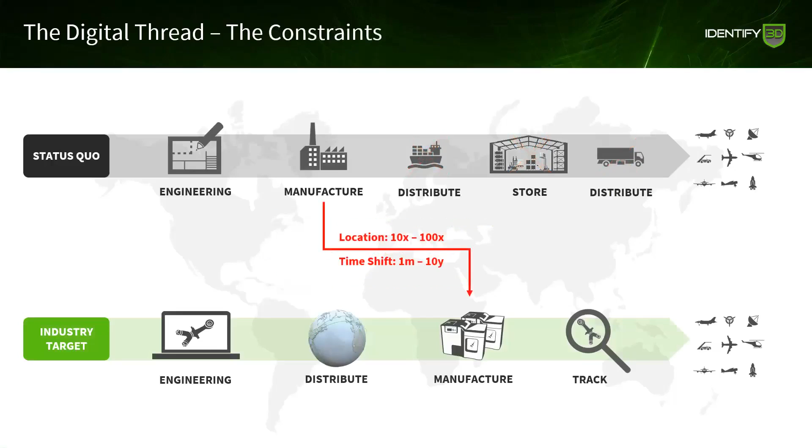Once we talk about the path of data between the engineering company that owns the data and the manufacturing—whether it's the internal manufacturer within a large organization or a supplier—we come with a lot of challenges. Challenges related to who has access to the data, and what can be done with the data.

If someone gets hold of this manufacturing data, they can maybe produce more parts than are supposed to be sold. There might be problems with how the parts are made and therefore their physical properties, and then there are problems of liability when it comes to the owner of the data or the owner of the part being put in the marketplace.

Or for instance, problems related to the data running in a CNC machine. What happens if an operator makes changes to speed it up because it's Friday evening and he wants to go home—what happens to that part or to that machine, even if you want to protect that asset? What we understand here is really guaranteeing the integrity of the whole of the data as it's generated, as it moves through the supply chain, as it is consumed by a machine.

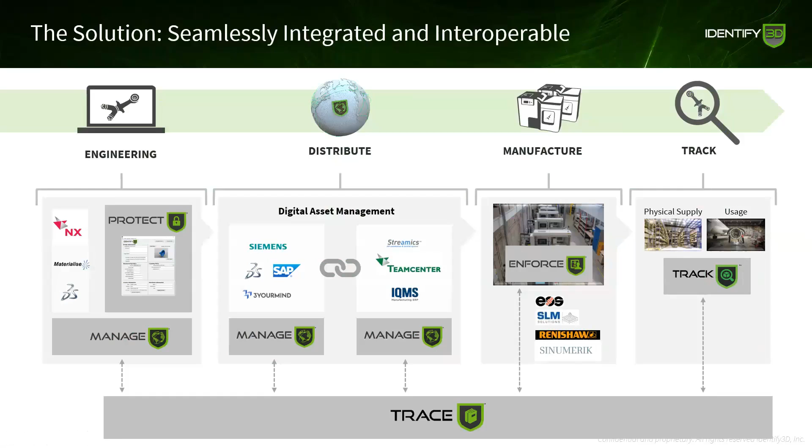So this is the high level of what we are doing. How we do it in the details is the subject of the next presentation from my colleague Daniel, which is going to show you a live demo.

One thing I want to highlight: what you're going to see now is an NX to Sinumerik demo. This is easier for us to show because we are embedded in Siemens NX. But as I mentioned, our Protect element can also run standalone if you use, for instance, SolidWorks or other software—we're trying to be integrated as much as possible with all those softwares, but it also works as a standalone.

So Chris, you there? Yeah, absolutely. Perfect, Fabrizio, that was great. So Daniel, I'm just going to give you your privileges now, we're going to make you presenter. I think everybody here is anxious to start seeing this stuff in action, but that was a great high-level presentation. Thank you, Fabrizio. Thank you.

All right, Daniel, it looks like we got your screen, let's see if we hear you. Yep, I'm here. Okay, perfect. Thanks, Chris, Fabrizio. Like Fabrizio said, I'll walk you through a full end-to-end demo here, starting within Siemens NX and ending at a Sinumerik control. So I'll go ahead and get started here.

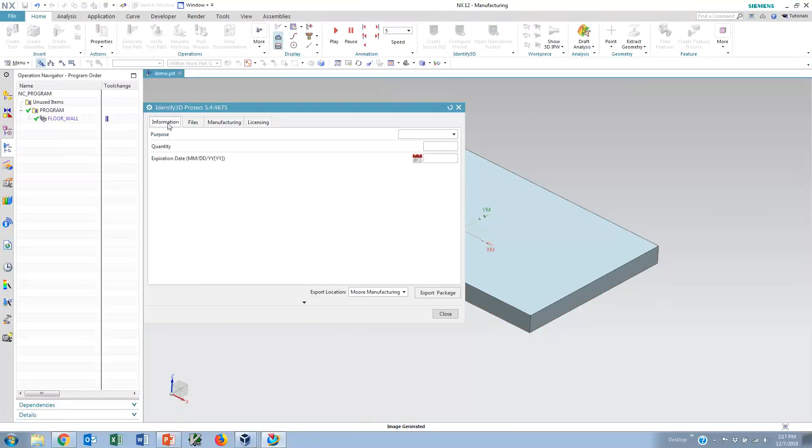You can see I have a very complicated part here that I want to manufacture. Within NX, we have our Protect application up here on the toolbar. We actually have a couple of different types of integrations in NX: one is a plugin with the same look and feel as other applications within NX, same format. We also have the ability to launch our standalone Protect application, and that's what I'll do for the demo. So I'll go ahead and launch Protect.

When Protect comes up, since we have this integration within NX, we're able to pull out information of the part and automatically load it within Protect. All right, so here's Protect.

So basically in Protect, you can see these tabs here. We go through a workflow to set up our digital container, or what we call a DSI, which is short for digital supply item. So the first tab here is defining the information on this part.

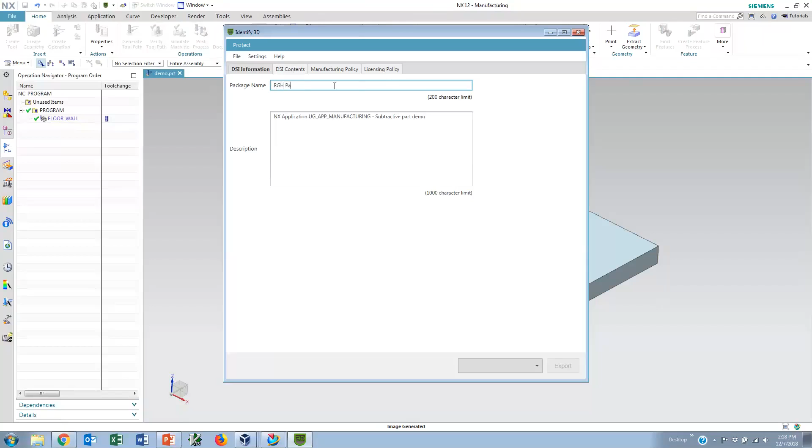I'll give it a package name, just give it something unique. And then I can give it a description if I want, so: part to be manufactured. This will follow this part throughout its digital life as we go down the supply chain.

Now I can define what goes into this digital container. This digital container contains two different sections. The first section is a private section - this is data that you want to protect, data you want to control who has access to. In this case, we were able to pull in the PRT file, the NX part file, as well as the G code that had been generated.

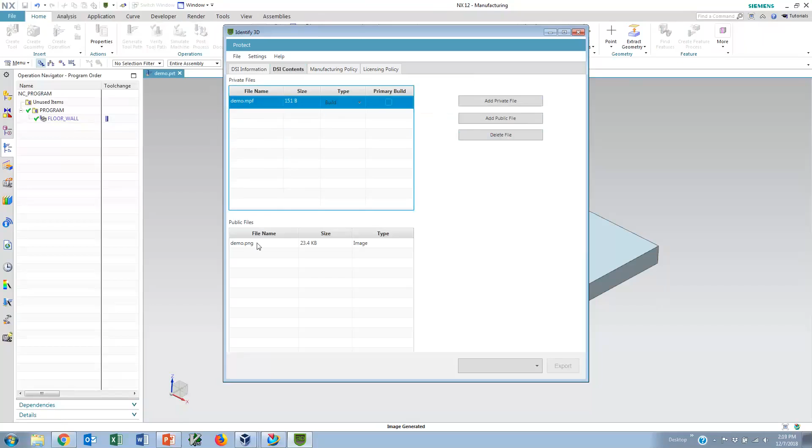For this demo, I'm only concerned about the G code, so I'm going to remove the part file and send the G code downstream. The second section of this container is public information - this is information that you don't care if anybody has access to throughout the supply chain. This could be ordering instructions, and in this case it's just a simple picture of the part that's being manufactured. So now I've defined what's going into my container.

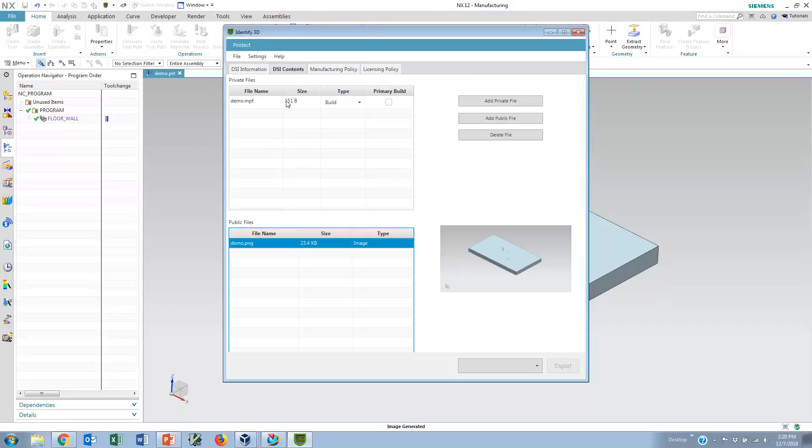Now I need to define the business rules and how this part will be made. In the manufacturing policy, I can select the type of machine that I want to manufacture this part on. So I'll select the device - I have set up a Siemens, just a generic Siemens Sinumerik control for an 840D.

Now I can define the business policy, a license policy. The purpose - this is a production level part. I can define the expiration date, so I don't want this part to be made past the end of January. And I can also define how many of these parts I will allow someone to make - in this case, I'm going to allow this part to be made 20 times.

I can also add a serial number to each of those parts if I would like, and I'm going to assign a pattern to those serial numbers. And then I also can assign a breakage - breakage is basically how we handle bad builds. So if something goes wrong during the middle of a build, we have different policies we can put in place on how that's handled. I'll leave that alone for now.

So now I've defined my digital package and my license policy, and I'm ready to generate the license that'll go to Manage, as well as the DSI that'll go to a digital asset storage. I have this manage register called Monarch Manufacturing. I'll click export - it generates the license file. That license file goes up to Manage, and then it'll generate the DSI, which is just an encrypted container.

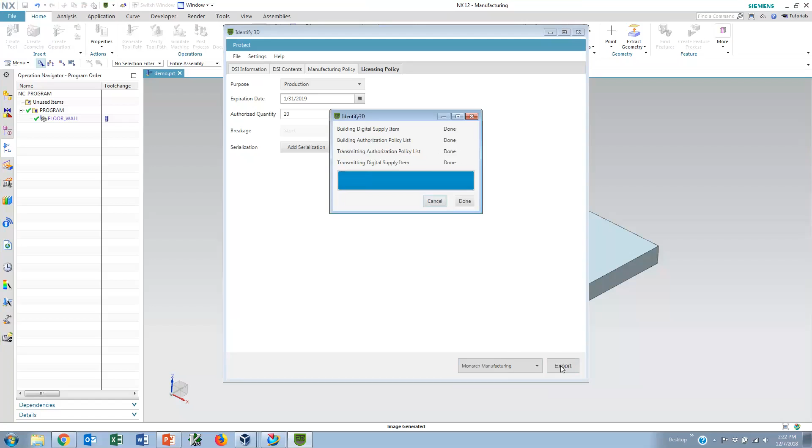However you're getting your technical data package to your manufacturing floor today, it can travel the exact same path. So if you're putting that data back into Teamcenter, or if it's going to a shared network drive, it can follow the same path - we're not changing the user's workflow there. In the demo case, we have a digital asset stored, like a network drive mapped to where that data is going. So now I'm done with Protect, I'll close out that.

And I'll switch over to Manage. In a typical situation, in the engineering and design phase, there will be an engineering Manage running on that site, and then that Manage could then license to a distributor that is running an instance of Manage, and then that distributor licenses to a Manage that's running at a manufacturing facility. For brevity of a demo, we basically go directly from engineering Protect to the manufacturing Manage.

So this is the front end for Manage, so I'll go ahead and log in.

So you can see here that the package we just created has shown up in Manage. There's been no authorizations made on this part yet, and I'm authorized to make 20 of these parts.

So now I'm on the manufacturing floor. I've got a part order in, and I need to deliver these parts to a client. So I'll click Authorize.

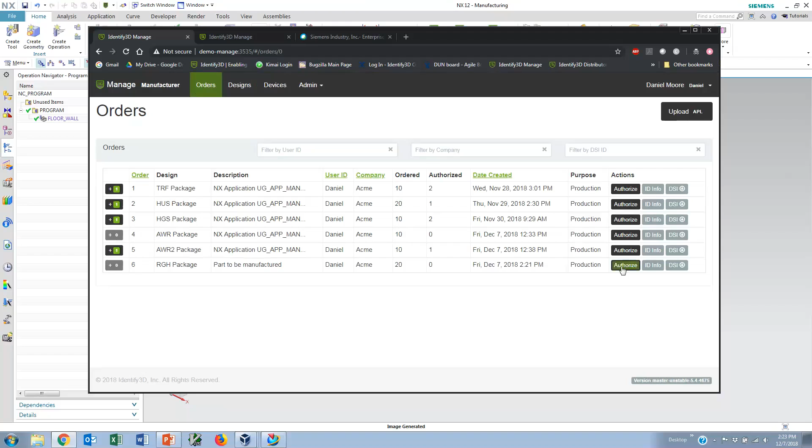Now I can select the specific Sinumerik device or Sinumerik-based machine that I want to manufacture this part on. So if you had 20 machines on your shop floor with Sinumerik 840D controllers, you'd have a list here, and if they were all running, you could select the specific one you want to manufacture it on.

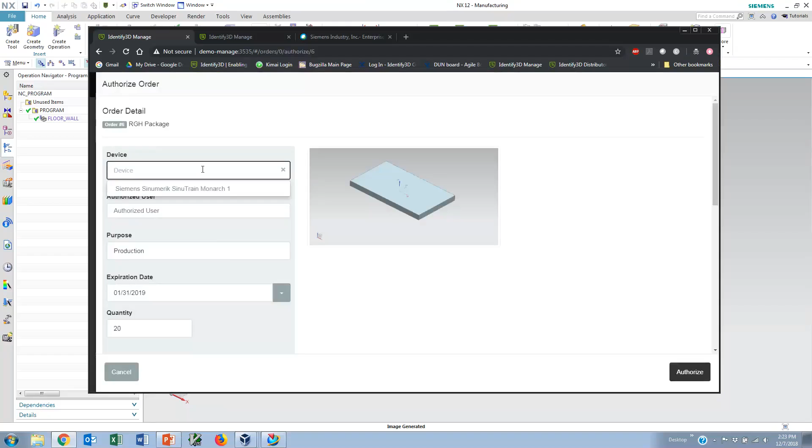In this case, I only have one listed, so I'll select that device.

Here I can also change the expiration date, but notice I cannot set it past the date initially set in Protect. I can only restrict it.

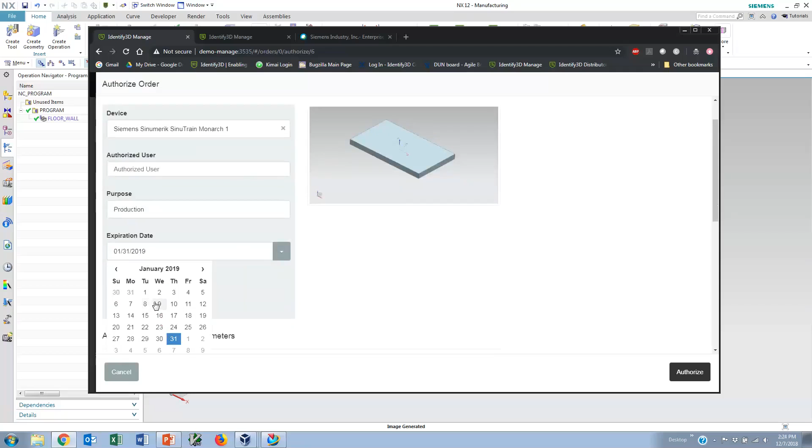Say I need the part 4 weeks before for some finishing work, so I'll go ahead and pull the date in.

I can also change the quantity here, but if I try to increase it—say I want to make 30 and click Authorize—it does a validity check on the license to make sure I haven't violated any of the initial policy set in Protect.

In this case, I tried to make more parts than initially authorized, so I failed the authorized quantity check. So I'm only going to make one part, and I'll change the quantity to 1.

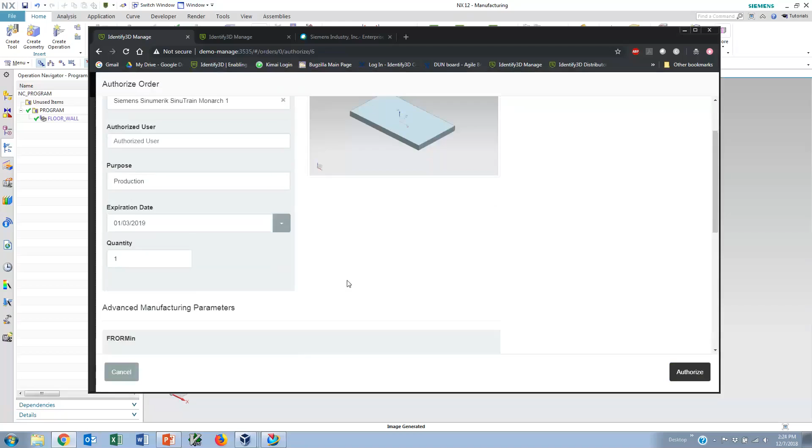Since we're on an 840D controller, I have access to a few build parameters. These build parameters are basically how we're going to allow the operator to run the machine. In this case, we have a simple example: feed rate override.

I'm going to limit the operator to run this part only with a feed rate override range between 80 and 110.

That's set. I also have a policy that this will only run on a 6-axis machine, and my Sinutrain Sinumerik is set up as a 6-axis. So now I'll click Authorize.

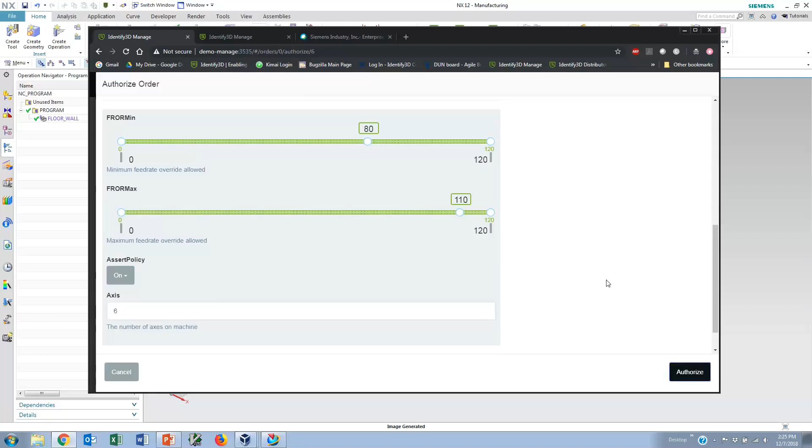It'll do a validity check to make sure I haven't violated any of the initial license policy set in Protect. Once that check is done, I should get green check marks, so the status is good. It generates a sub-license, which is then sent to the controller.

So now I'll switch over to Sinutrain. We actually have an integration of our Enforce software running on the Sinumerik 840D, and this is the Sinutrain, which you're probably very familiar with.

What happens in Enforce is it basically goes off to Manage every so often and asks, do you have a license for me? And as soon as it finds that license, it'll download it.

It'll then go and download the DSI file from a known location, and then create a job on the control. That process usually takes a minute or two, so we'll give it a minute.

There it is. Now we have this new job under the map Identify3D folder, HGS package 5. I'll go ahead and open that real quick to show you the contents.

We actually haven't done anything with the underlying G-code yet. The G-code is still encrypted, but we generate this header file that basically gives you information on the part.

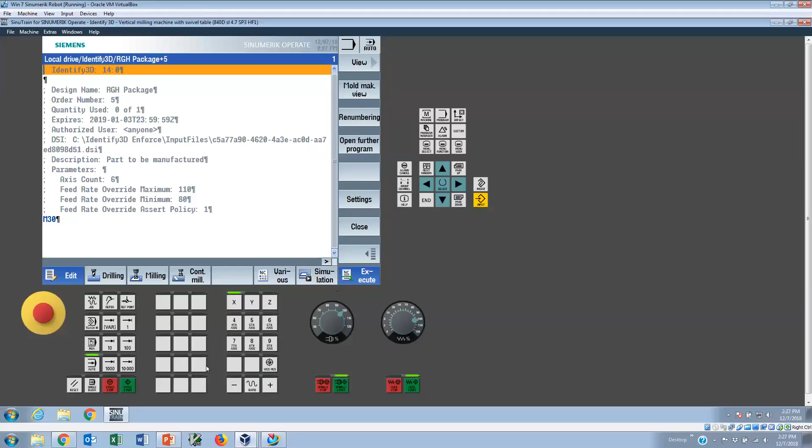Now I'll go ahead and click Execute to load this program. And now the program is loaded.

We still have not decrypted any G-code, but if I slide the feed rate override dial to something below 80, you can see that we post an alarm. The alarm says feed rate override setting too low—the restricted range is 80 to 110.

If I try to run the part program now and hit cycle start, it will prevent me from running the program. Likewise, if I go above 110, the alarm shows again and prevents me from running. So I have to run this program between 80 and 110 for the feed rate override.

As soon as I slide that dial back within the allowable range, the alarm goes away. I can now hit cycle start. It decrypts the program and then allows the program to run.

This part takes quite a bit of time to run, so I'm not going to let it run to completion, just for brevity.

One thing while it's running, if I were to slide the feed rate override out of range, it will actually stop the program and prevent me from restarting until I slide it back into the allowable range. I hit start, and it picks up where it left off and continues to run.

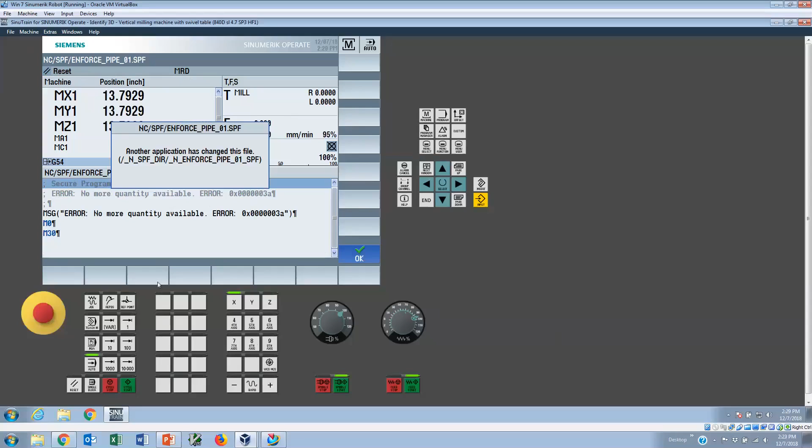So for brevity, I'll hit reset to stop the program. Now, since I've only authorized one part to be manufactured, and I've run that one part, it'll reload, but now I get a different header file that says no more quantity available. So if I try to run this program again, I get an error saying no more quantity available. I'll hit reset to clear everything out. And if I go back into Program Manager now, that particular job that was just created has been removed, so I'm not allowed to run that program again.

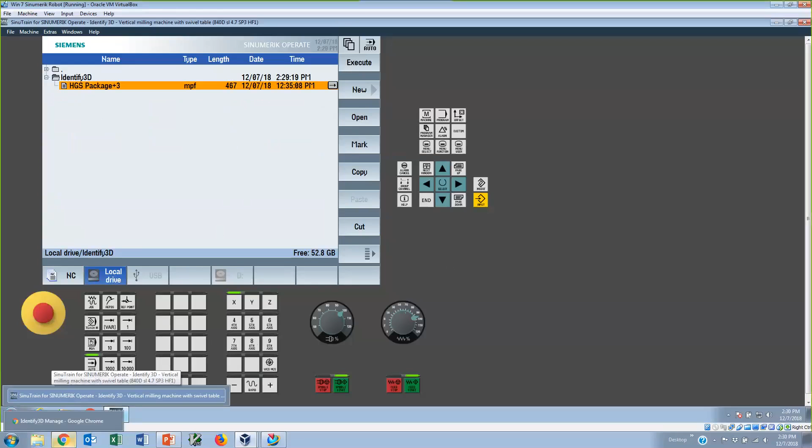So what ties this all together now is trace. We've gone through NX, Protect, Manage, to Sinumerik. So now if I switch over to trace and log in here, I can see a complete history of everything we've just done.

So I'll go ahead and turn this over for any Q&A at this point.